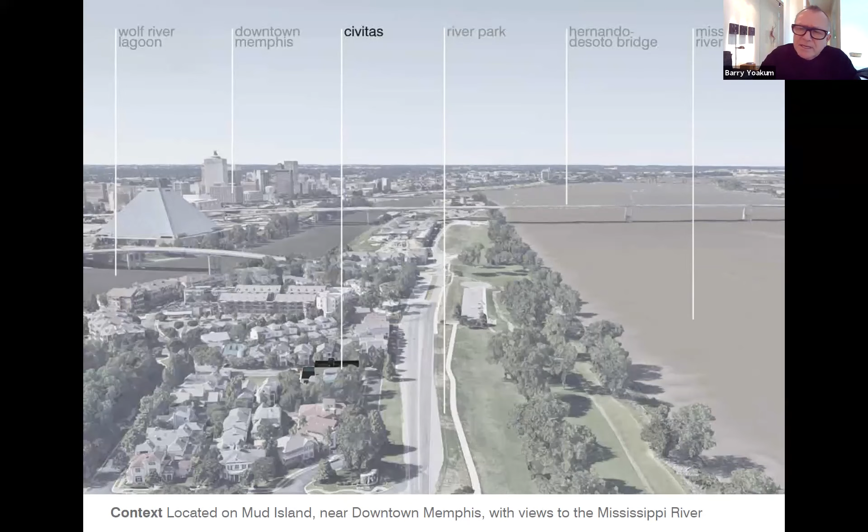It's 2,800 square feet. And it's called Civitas, and Civitas has to do with a sense of community.

That was the goal from day one with my wife and I. We took the goal of, okay, we're not only going to do a home for us, we want to do it for our neighborhood, and we want to do it for our community.

And usually people chuckle about them when it talks about neighborhood because it actually fits. Now that we've been in it a year, it's amazing what the neighbors really say or do about it. And it's definitely interesting, it creates dialogue. People from all over the place come and have looked at it, photographed it, and it seems to be a popular spot for photo bombs, for taking pictures of people.

It's the strangest thing. But I think that interest is what we've got to do to change the world on the world of climate. It's not going to get there by just signing an AIA 2030 form, which we were one of the earlier adopters of that signature. It's definitely the beginning. There's a lot of different driving forces that got us to where we are.

But to do it as one, for the betterment of the world, we've got to leapfrog, and we want to share lessons of all the good, the bad, and the ugly of getting there.

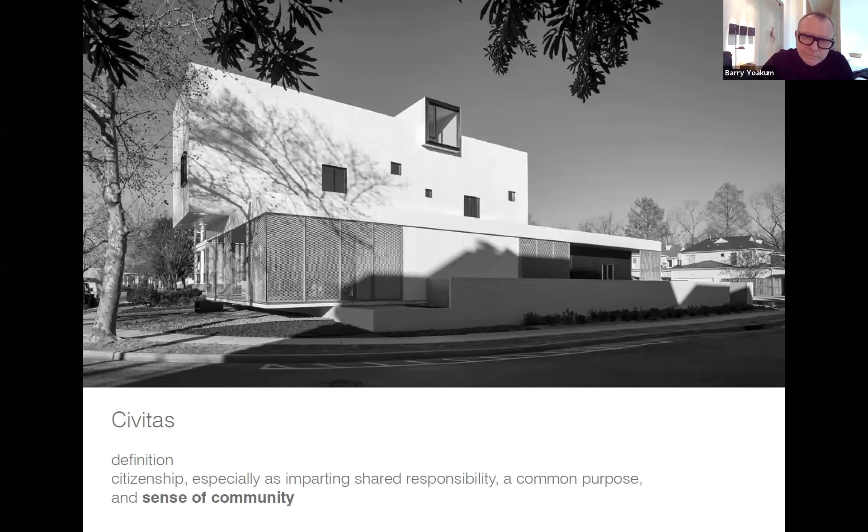So the mission was to create this actionable change, not talk about it. We put our money where our mouth is. You're going to find out.

My business partner and I also did that on our offices, and we're about to submit that for certification for ILFI. But it's a progressive home. We saw it early on that it would be a laboratory experiment. We were sitting in the audience listening to Julie Snow and Angie Brooks talk about the COTE Awards in New York, and we looked at each other and said, you know what, it's time to be an example and live it, breathe it, test it, and be a living laboratory.

So it's a demonstration. At that time, in 2016, we were looking at accomplishing AIA 2030 commitment, that's going on to be carbon neutral. As it stands, we've submitted for carbon positive and energy positive through ILFI, and we've got the numbers submitted, and we're waiting on certification.

A little bit about my past that goes into this. I was born in Knoxville, raised in Memphis, Tennessee since 1957. Love this area. The greatness about working in an area that is attached many times to history is it gives you a chance to elevate and have a major effect on a community, and we believe we've done that. And we hope we continue to do that.

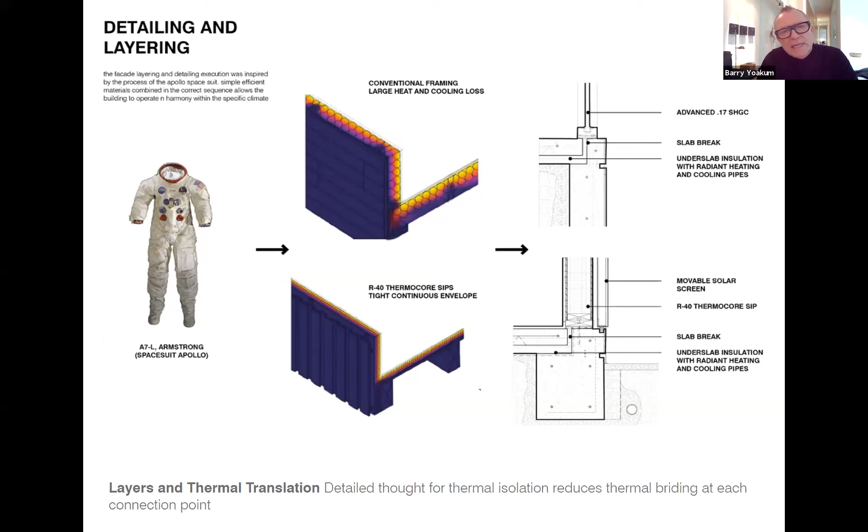So Civitas started becoming about layers. How do you move through 200 years of life? And if you start at the basis, how can you offset wasted energy and make it more comfortable? And where layers came to was, how do you start creating these different layers, which also created ideology around the word facade. The details of creating a number of layers we'll see later on in this presentation became a really major driver of how we layered not just details and elements and materiality, but how we layered spaces and how we shifted spaces and forms to create more space.

So what you see here is really the beginning of the layering and components overall of the project, and how we shifted glass around by doing studies, and how we have 16% of our skin envelope actually dedicated to glass, which typically in most homes is probably in the higher 20 percentile to 30 in many cases. So we had to start allocating and come up with concepts.

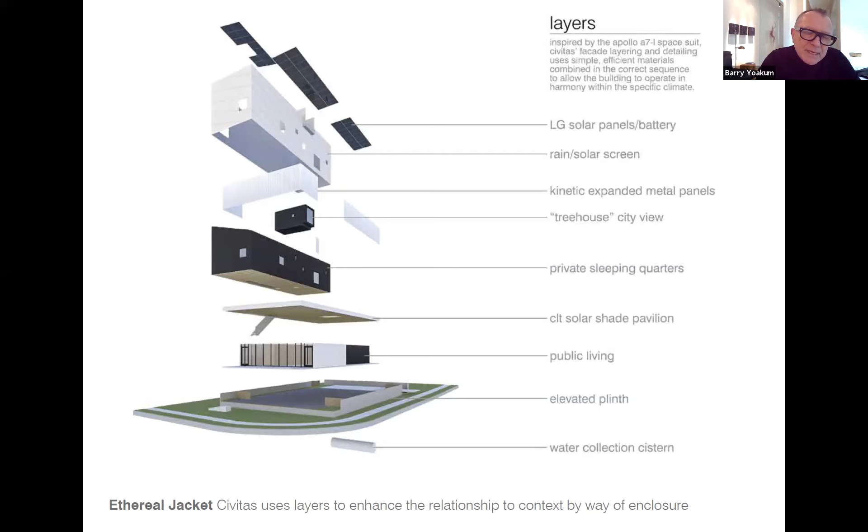And part of that concept was the lower pavilion. There's really three forms: there's a lower pavilion, which is public living, and those are very accessible to the public and our friends and guests, and even bringing people in. Then there's a very private space you're going to see that we call the sanctuary. And then there's a super private space on the very top, which is the nest. You have to really be invited to get there. And then how these different components come together.

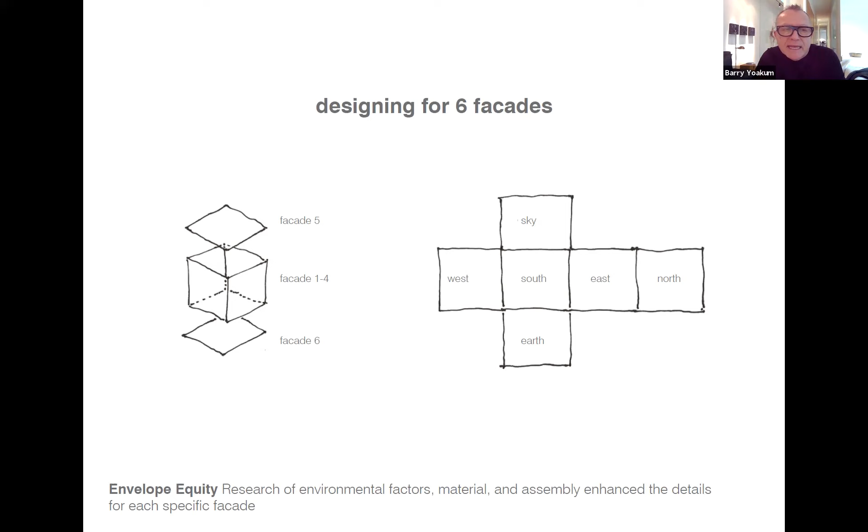They started making us look at facades at first, when we started looking at solar panels and how we related to the sky, and how the solar panels themselves started becoming a rain screen, or a solar screen and rain screen. And then the sixth facade is how you start dealing with the earth. In our case, we have one of the highest seismic conditions in the country, the most major east of the Rockies, and soil that is 12 feet of soil that was dredged from the Mississippi River a couple of decades ago, and how that impacts a zero carbon home.

The house has 60-something panels. It's on-grid, off-grid, and has a battery backup. It can survive per the AIA 2030 challenge, which required it to survive at least a little over a week. This house can actually survive longer than that.

Half of the panels go to the grid, half go to the battery. We sell all the power from the on-grid system directly to the grid, and we have to buy it back, which is slightly beneficial to us, but more beneficial to our neighbors and the world because we're lowering the utility demands of the area.

Paul wrote a story when we were honored with the Metal Architecture Awards this past year. The story really dealt with light and shadow, and that's what the house became a lot about.

How does one express what a sustainable home is? It really starts becoming about layers, which lets you express it much like an Ansel Adams photograph. That's all these different layers of how the house changes. One of my neighbors came out six months after we'd moved in, and he was totally amazed, now that all the construction's gone, that the house really becomes a large art installation because it's constantly changing.

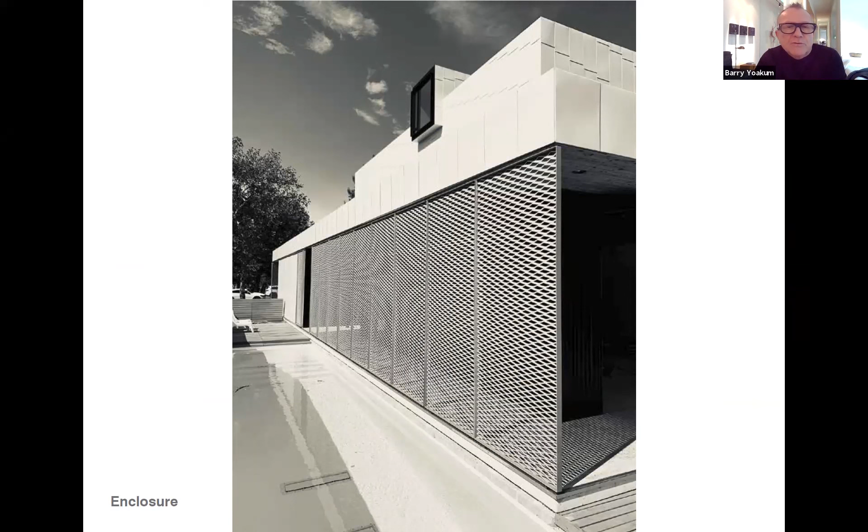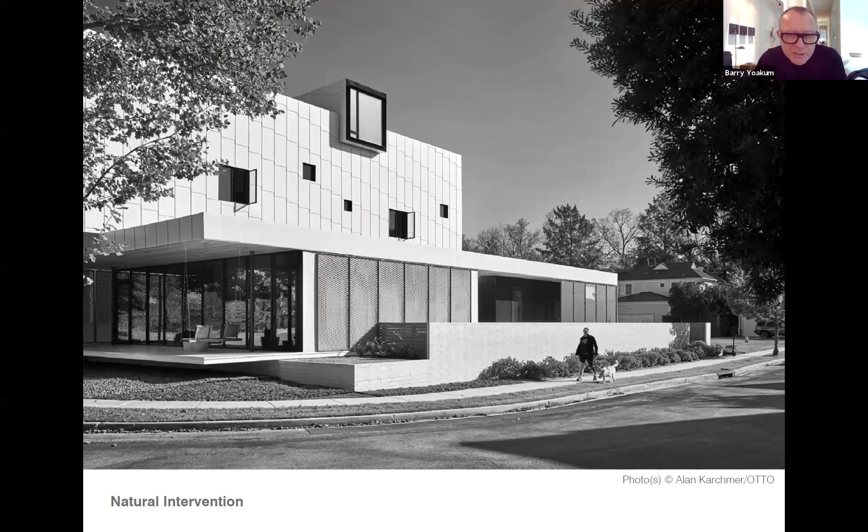In this case, the water, the pool, the deck area comes and goes and can be controlled. The sun is controlled, and the amount of privacy into the later glass is controlled by the natural use of the scrims. The intervention that comes out of that is constantly changing, and that makes it quite an enjoyable experience.

We actually use windows in this house. I had a house that was one of the first LEED homes in Tennessee years ago that we sold to get into this one, and we never used the windows hardly. It wasn't that sensitive a design, almost a dozen years ago.

This one's very sensitive. It uses a lot of principles of the South for how to move air through chimney effect and cross ventilation, much better than we would do in the past.

You can see someone moving these scrims. They're lightweight, about 40 pounds a piece. Anybody can move it—our son can move it, Gas can move it—and it's ever changing. It changes with the seasons.

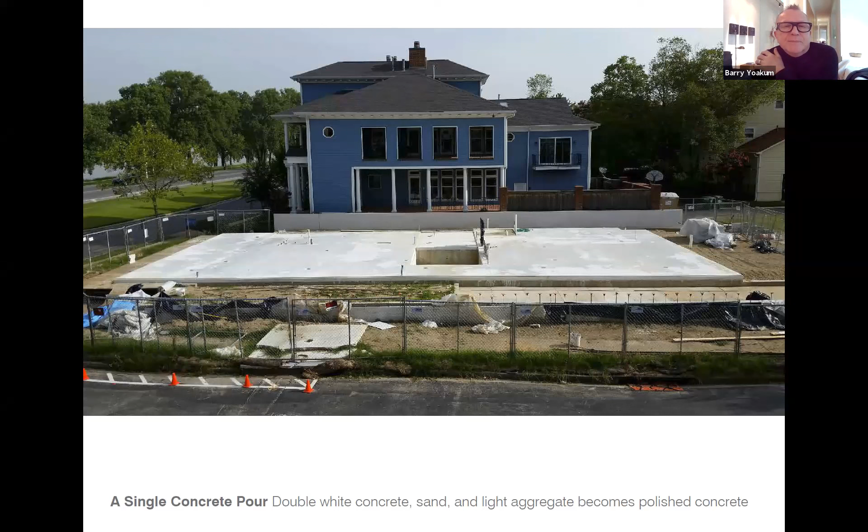We're going to move at this point into some of the constructability and how we got to the envelope. We did a single pour concrete and used a lot of prefabrication. We had a lot of complexity underneath the slab.

The entire slab is radiant heated, including the garage area, which has a separate zone that we haven't used at this point—we don't need it, the house is so well insulated. We have geothermal involved, but it only runs at about 5 to 7% capacity, which helps reduce load tremendously.

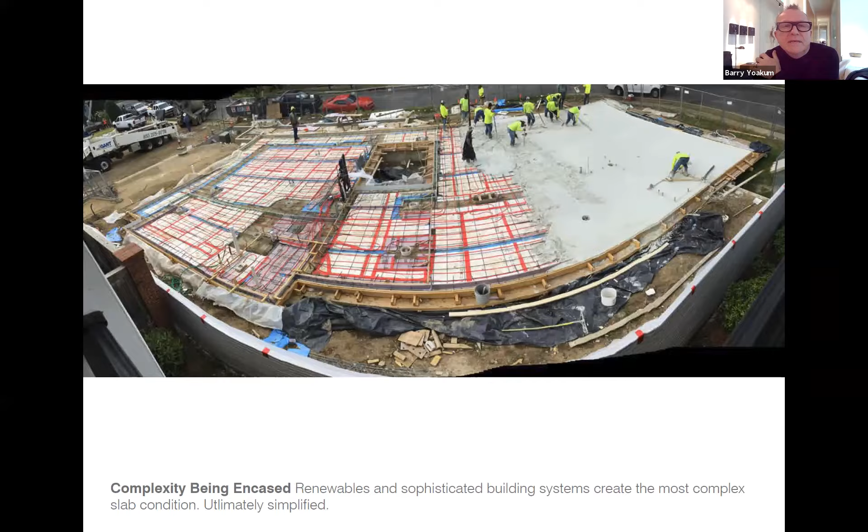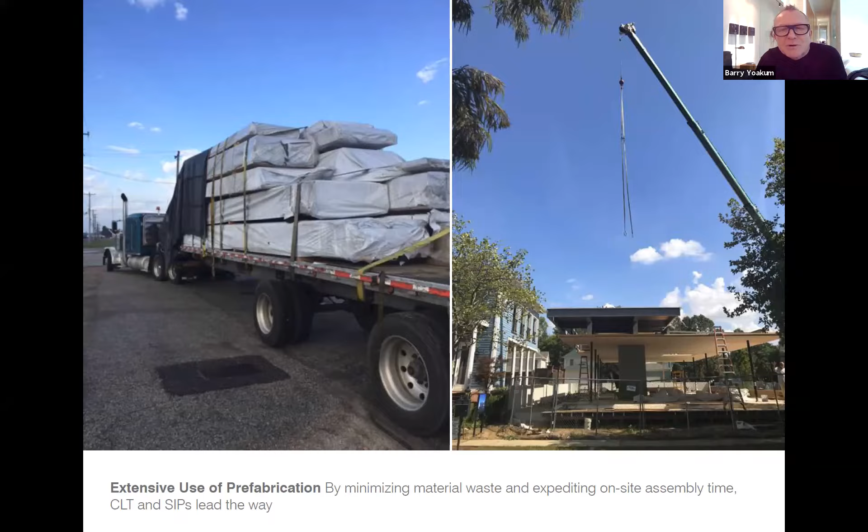The prefabrication of the steel, the cross-laminated timber, which is heavy timber elements, and how we put those together, and then the infill is our SIPs. Everything came packaged. Yes, we had a crane there for more days than we wanted, but it went together pretty effortlessly once it started moving. We use SIPs a different way.

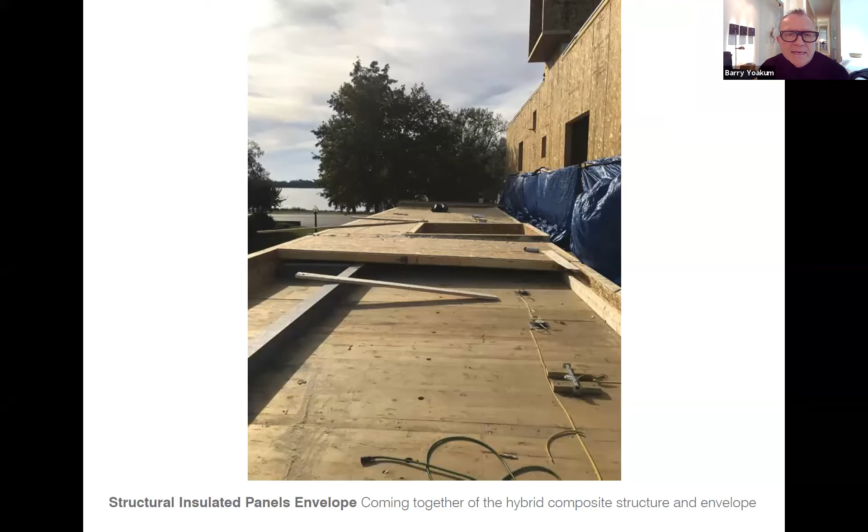It's the backup for the metal, and we used them in every condition we could. We never quite created an attic-type space this scale to support the solar panels. And we also did something that's been written about pretty well, a double skin in this condition, all metal.

One subcontractor on this did everything that touched metal, which we thought was smart. It also begins with the layering system and the type of vapor barrier. That's one thing we found out very quickly, how those two systems work hand in hand, and they're not separate devices, they're very much one together. The metal installer definitely had to approve that, because they were really warranting and wanting to put something together correctly.

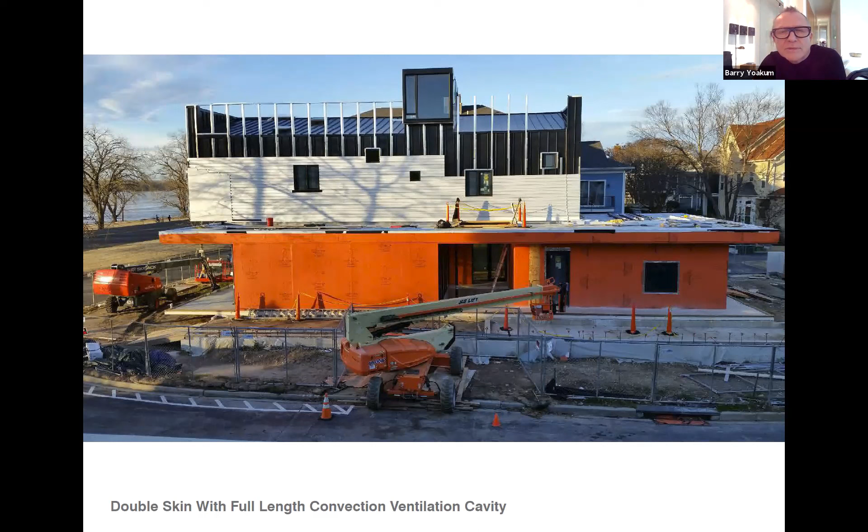This 60-something foot long metal double skin also serves as a solar shade on the south facade. It also serves as a gutter. It runs down to a downspout, technically, into an 80-foot long gutter that we catch into two cisterns located underneath the parking in the back.

The canvas is ever changing. As I mentioned earlier, it has started to become a piece of art in itself, the way that nature actually engages with the house. We think that's a very big aspect of one reason we chose a white coated panel, was to become a canvas. That came out of many design studies.

One thing I wanted to move to, as we're winding down, is the interior. We use metal on the interior. You can see the vertical fluted panels. We have four different panel systems on this house, all broken up, all pretty cost effective. We actually run this metal from right to left, and you can see it move into what we call the gathering space, which is basically the entry, the kitchen, the dining, and also my wife's office.

That metal, one thing that always fascinates me in the world of design, is trying to bring exterior materials to the inside, which we all know is very difficult at times, but sometimes you just have to stretch those limits and implement them in how a form moves through a house. Many of these forms are shifting and sliding inside the footprint, and it would be a shame to have broken that and changed materiality. Even if you changed it to the same color, it would not be the same.

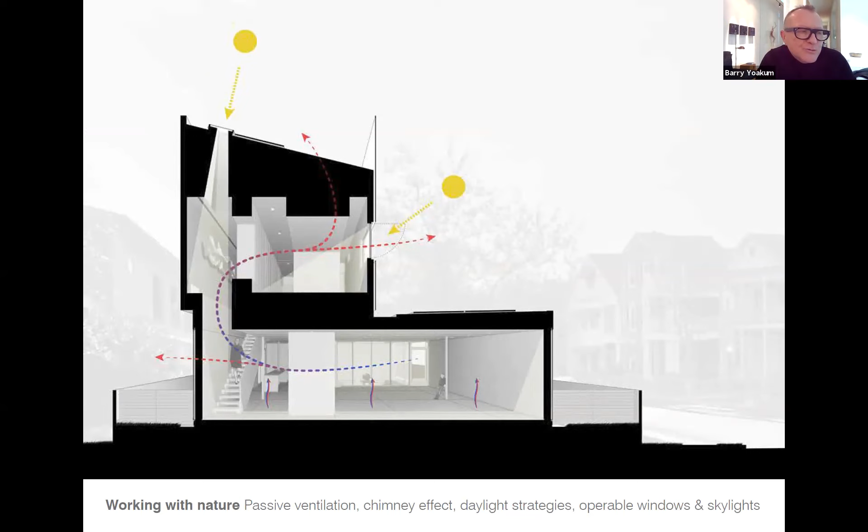We worked with nature very early on. The house is actually a chimney in itself. The nest, the third story, you can't see it here, but you saw it in some earlier pictures. It actually has an app-operated skylight that we can open to create a draft, much like an attic draft fan that you would use prior to electrical mechanical ventilation.

But up top, when I talked about the double skin, we added 2 more layers to this, except for the solar scrim. So on the 2 layers above, you've got about a 3-inch airspace between metal conditions, so it really acts as a vent and as the gutter. We used Tally and Sefaira in modeling. We had never done that before.

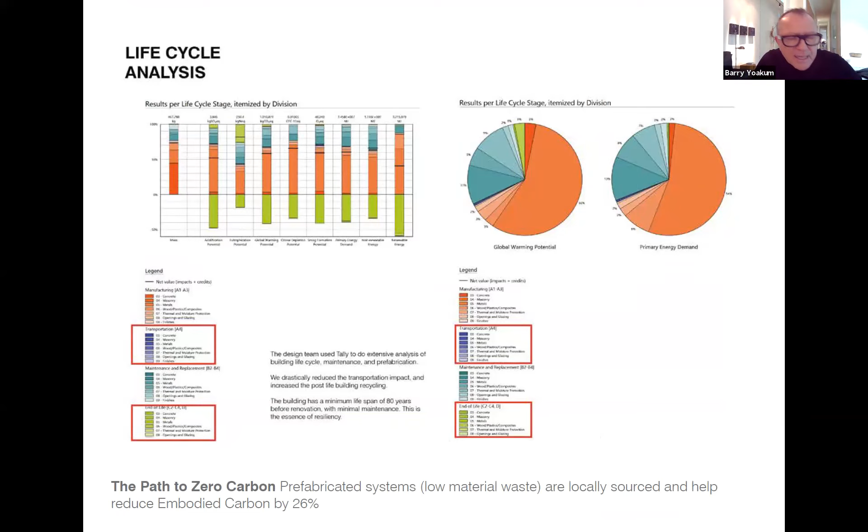We invested in that for this project. And one of the big goals - the reason I'm ending closer on these two slides - this really started changing our practice. We've worked on all types of sustainable projects, but when you start to marry performance with high design, it takes on a whole different attitude within the office.

People start getting attracted to it. People have asked me how people got on the project - pretty much people volunteered and said, hey, I'd like to work on that, and they would do different things their skill sets would allow them to. I thought that was pretty exciting, trying not to disrupt a practice any more than you have to when doing research projects.

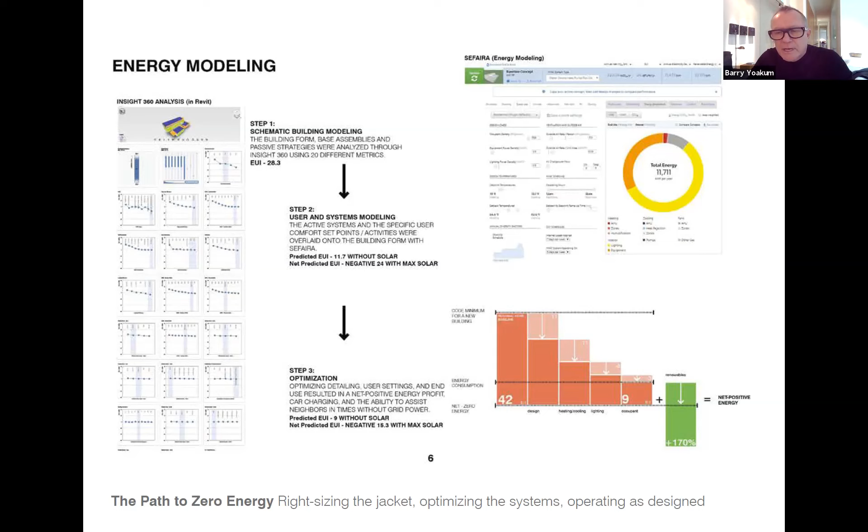And we do a lot - we do a lot of exploration early on, on a lot of projects that either come to fruition or don't, but we learn from them. One of those learning parts is what we call the small, medium, large, and extra large.

We moved it into a larger project for the city of Memphis. We're actually working with them, trying to help them with their very first guidelines of how to bring that framework into the city of Memphis and start formatting and letting Memphis be a leader in that.

What we're excited about is this one project not being intended to change everything, but we feel like now that we're complete and have been in it a little over a year, it's changed a large scale variety of projects and typologies, and we think it's helping the world - and we hope you see that too.